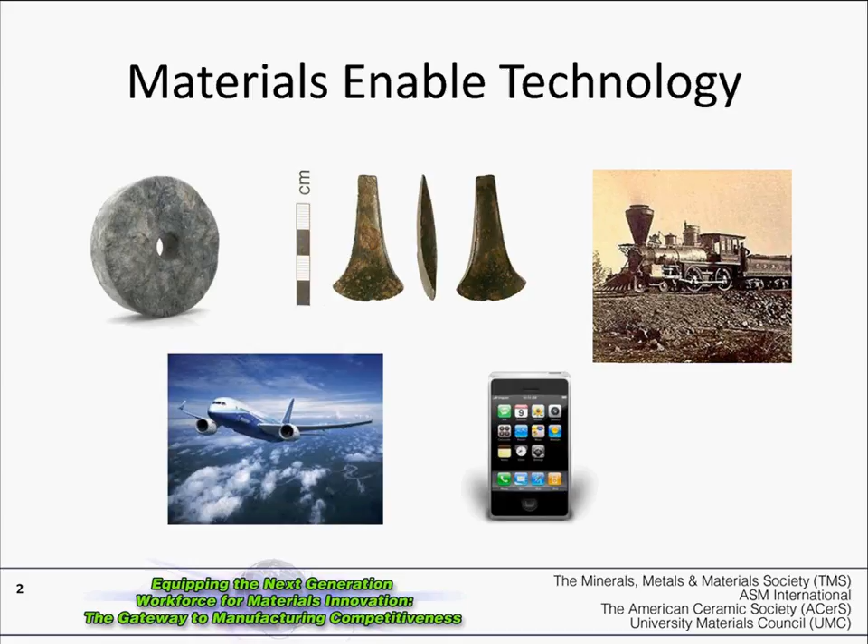But that smartphone that Kevin showed us, I always remind kids when I talk to them that smartphone was made from a pile of rocks. Think about that. That's materials innovation. That's what we're talking about, accelerating that process of taking rocks and turning them into incredible materials that can drive our economy and our lifestyle.

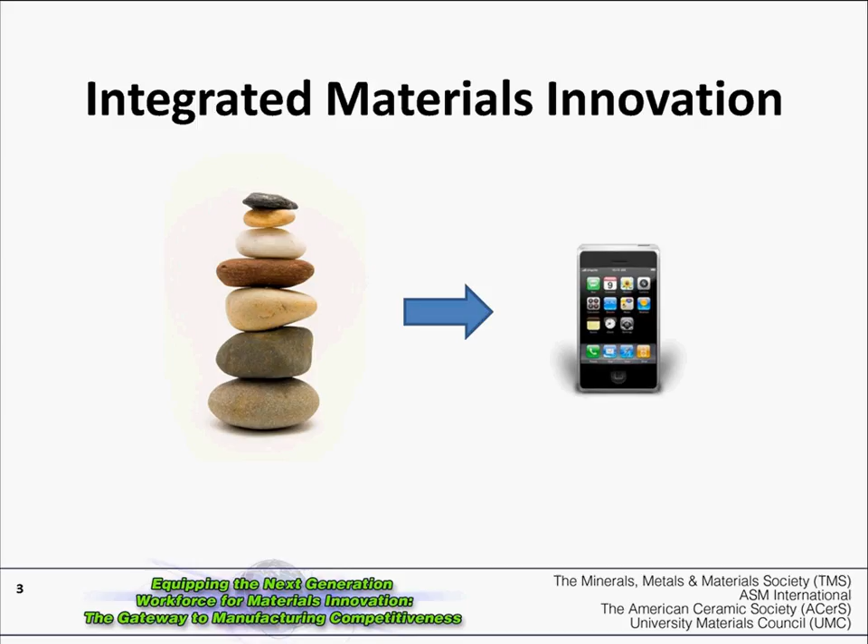The second thing I want to do is give you a 60-second lesson on computational modeling, because some of you are familiar with computational modeling, some are probably fuzzy, and some would probably know nothing. I take an example from the specialty alloy industry, and we call it thermomechanical processing. Blacksmiths call it heat 'em and beat 'em.

On the far left is an ingot, maybe a 10,000-pound ingot of nickel base or titanium alloy, and the engineer wants to come up with a simulation to learn how to process that ingot to get the size and the metallurgical characteristic that he's striving for. So the first thing he does is, on a computer, he'll take those geometries and create simple shapes. There's the ingot and the forging die that you'll be deforming the material with.

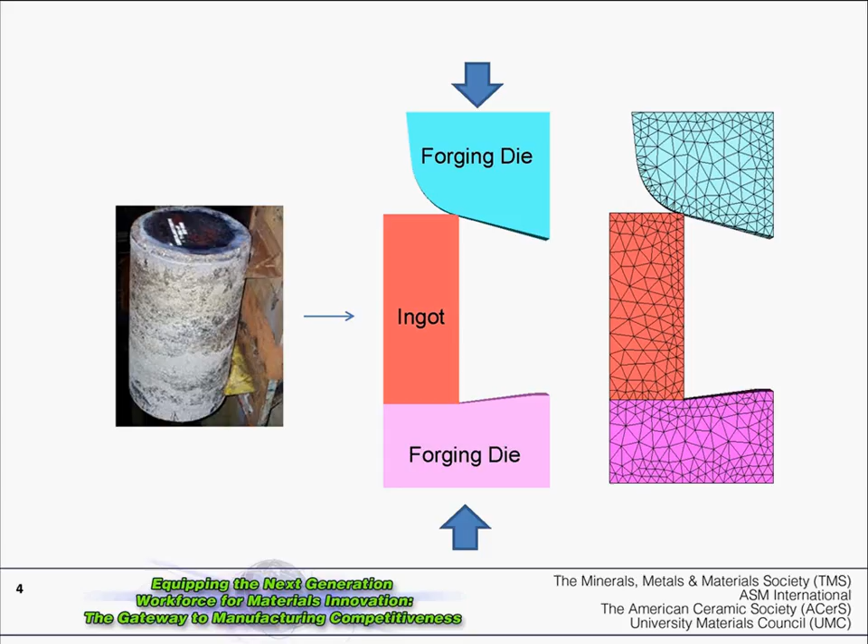And from that geometry, on the right, do something called meshing. All meshing is, is that you take that geometry and you break it up into tiny little pieces. We call them finite elements. And that's where computational modeling comes in, because for each of those finite elements, you write a set of equations. This is the last differential equation I'll give this afternoon.

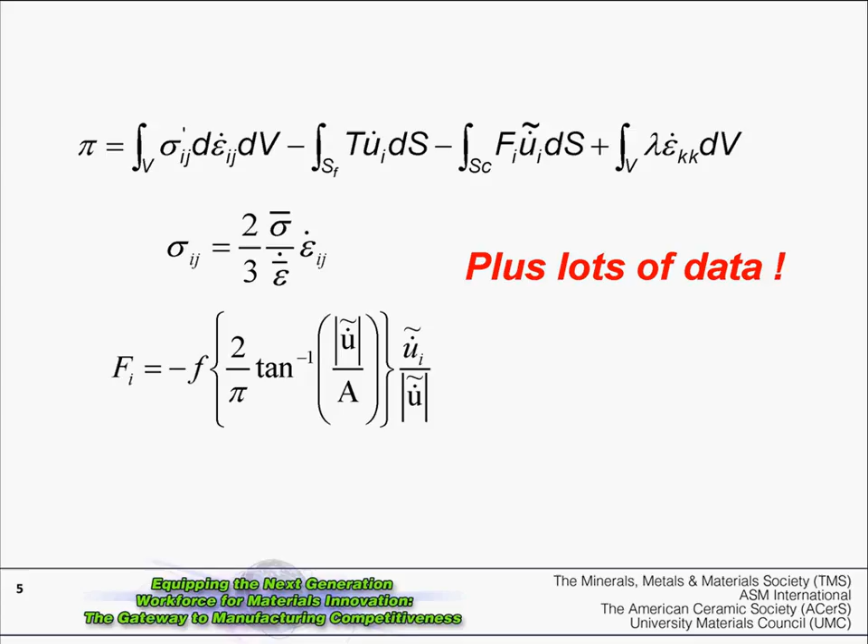And you set up boundary conditions, and you use a computer to go through millions of iterations of solving equations so that each finite element meets certain boundary conditions next to each other. And over a period of time, you can simulate the actual deformation process from equations that describe the physical changes that are occurring. I put in red there: that equation's nice, the computers are nice, but unless you have lots of very, very, very good data, all your results are meaningless.

You always come up with pretty pictures, and all this is a result of a simulation. The color coding could be temperature, could be metallurgical structure, it could be accumulated deformation. But that result is only as good as the data that you put into it. And as the old adage goes, garbage in, garbage out. And one of the topics we'll have today is how important it is to generate an infrastructure where there's good data available, that many people can access and get good results.

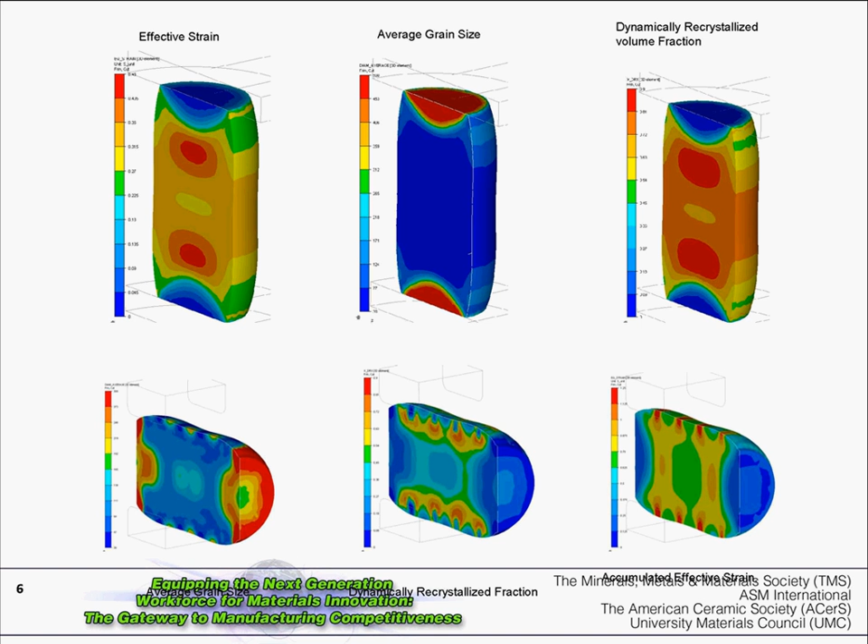That's your 60-second course there. Back to the specialty alloy industry, we use computational modeling at all levels. If you were to tear apart a jet engine and look at the most critical parts, this is a nickel-based superalloy at a very high magnification. They're complex materials, complex alloys, lots of phase interactions. The phases you see give incredible strength and service life to jet engines.

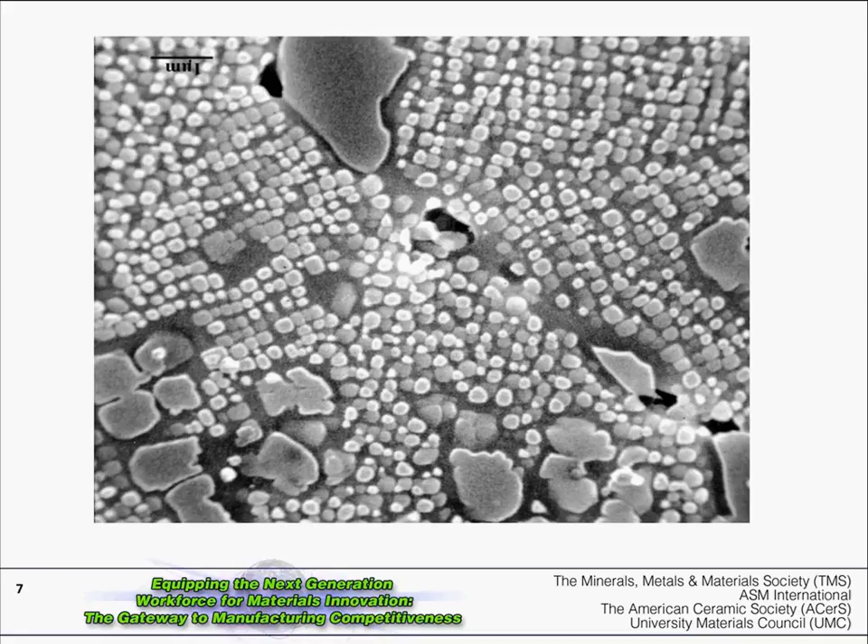That's one application of the computational modeling. That's usually the easiest part. The next more difficult part, and something I spent 35 years doing, is figuring out how to make that alloy in production, scale it up from a laboratory 10-pound heat to a 30,000-pound heat. And you go through modeling for melting and casting, which is shown up above, and down below through thermomechanical processing.

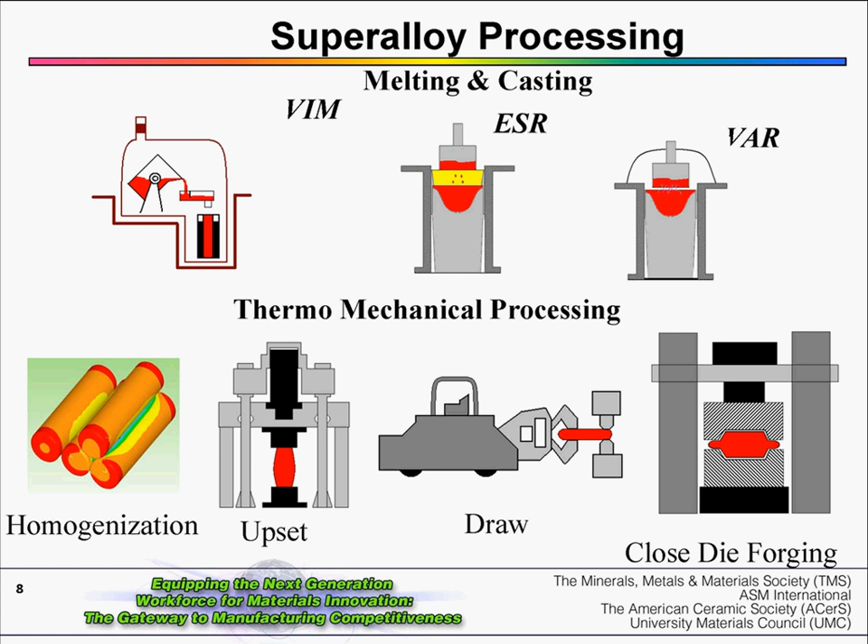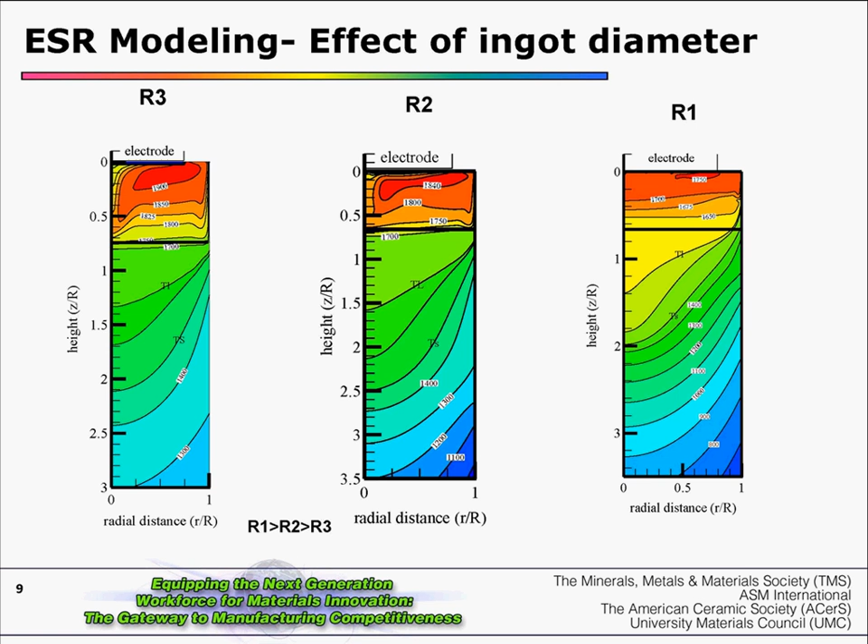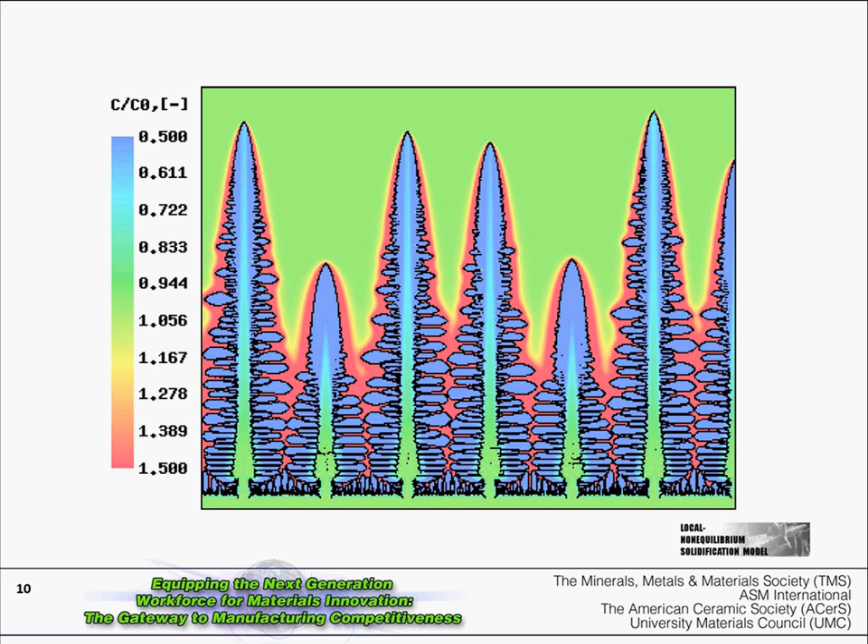We also dive in deeper in solidification on a micro scale, and this is dendritic solidification, solid growing into a melt. We look at this detail in these very complex alloys and look for segregation and phase stability issues that may result. Always pretty pictures, though.

Especially in the alloy computational modeling world, we use computational modeling throughout our processes. But each of the processes, whether it's alloy design, melting, solidification, they're modules. We do modeling on a very specific problem, and they don't talk to each other. A specialty alloy producer would go through this sequence, and then we would send it off to a customer who then would forge it, heat treat it, machine it, and then eventually create the component.

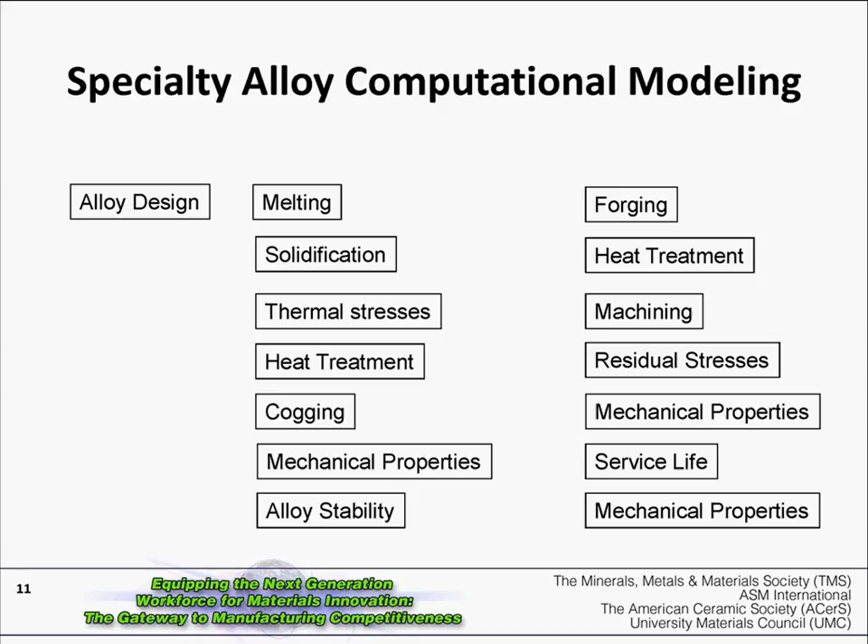The real key to this talk today and our discussions that we're going to have is integrating each of those modules. When you see ICME, that's what it's all about, especially in the metals industry. Having the models talk to each other, it's integrating all these different modules so that they build upon each other, and you can do the development at a much quicker pace.

So you take your alloy design, but when you do alloy design, you should understand the solidification that's going to be going on, the mechanical properties, the stability, and even all the way down to the service life in the component and then the total cost of the system. All that can be simulated. That used to take 10 years to do, and usually when you got to the end of the 10 years it didn't work. So now you can do that in a week. Just think about the power of that, to be able to integrate those tools.

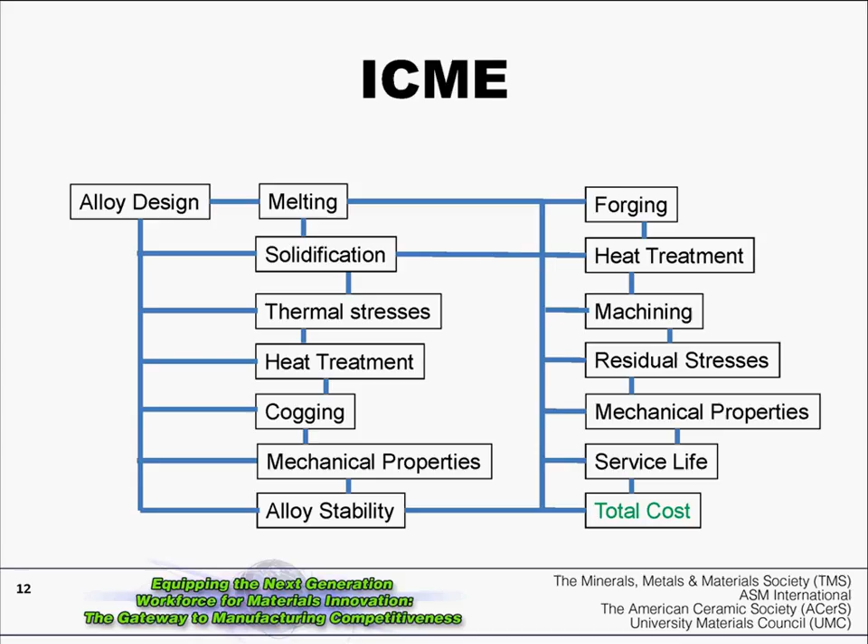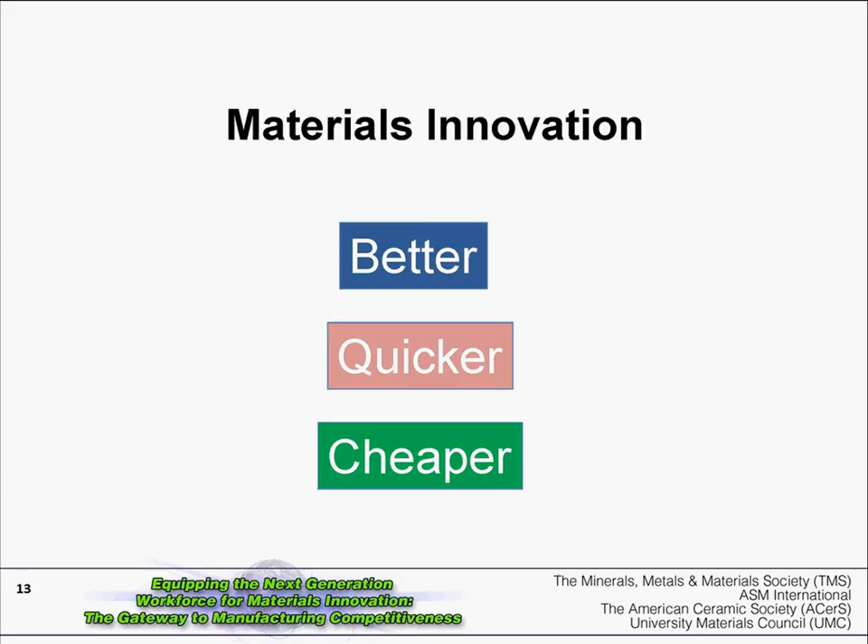It's all about materials innovation, making materials better, but making them quicker and cheaper. And in a competitive world, the person who does it better, quicker, and cheaper is going to drive the economy, the world economy, and drive the next generation of technical innovation that are going to use those materials.

I put together this schematic just to illustrate a point. It's a plot of impact versus time. And probably the most mature of the modeling capabilities that we have in our industry right now is thermomechanical processing. It started back in the 70s, at the Air Force Materials Lab and a bunch of other national labs. We did a tremendous amount of work when the software was originally developed. Computers were slow then, and it matured quickly and is used throughout our industry.

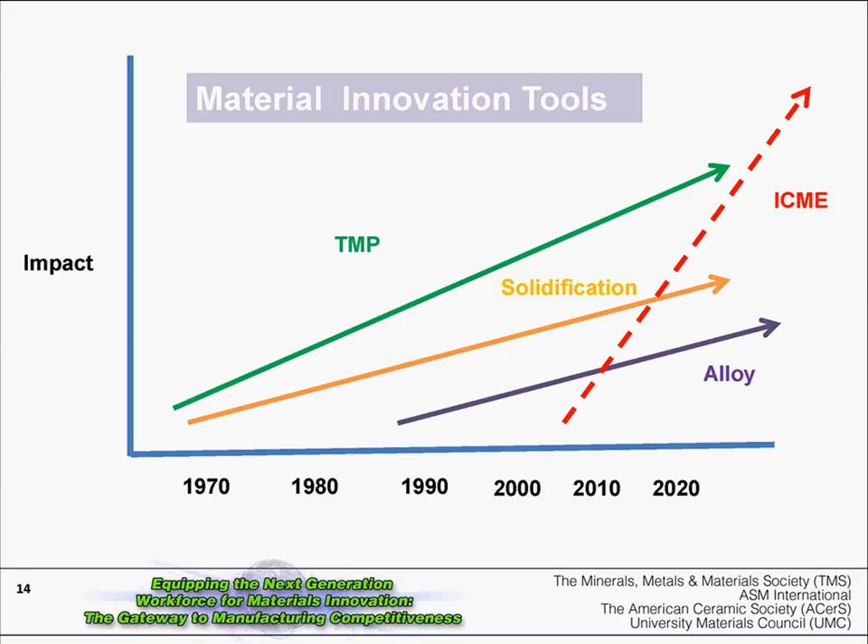The second would be solidification, and alloy models are just starting to take off. We're getting some benefit from them now, but we're just at the beginning of that. The key to this slide is the dotted line, and it's the integrated computational materials engineering line. And the entity, whether it's a country or business, in the competitive world, the one who climbs this line the fastest, has the greatest slope, is going to have a tremendous advantage in the world of industry.

In the old days, they stayed. They contributed tremendously to our economy. But now it's difficult for them to stay, and they have reasons to go back to their homelands and take those tools back with them. Up to 70% of our top graduates in engineering are foreign nationals, and they leave the country. That's all I have to say.